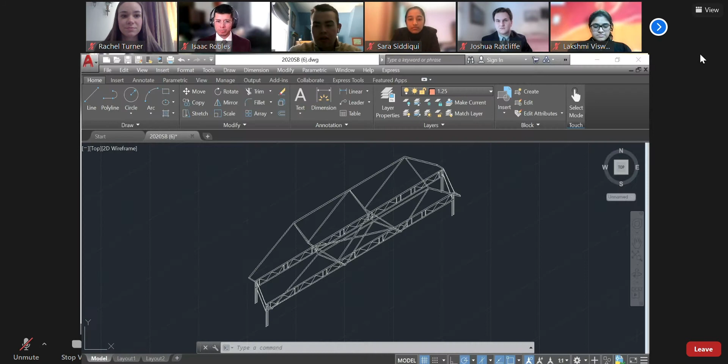Hi, guys. When we first started the design, the first things we had to consider were the restrictions that came with the work site. Our three main ideas were a deck bridge, a Pratt truss, or a Warren truss. When we weighed both the advantages and disadvantages of all the designs, we decided to go with the Warren truss, and Sara will explain the disadvantages and advantages.

Some of the advantages of this design are that it's symmetrical, sturdy, and aesthetically pleasing. It has less building material than most other bridges. Since it's constructed piece by piece, it's more cost effective rather than looking at the whole picture, and it gives more options on how it can be built. Since it has triangular aspects, it makes it even stronger.

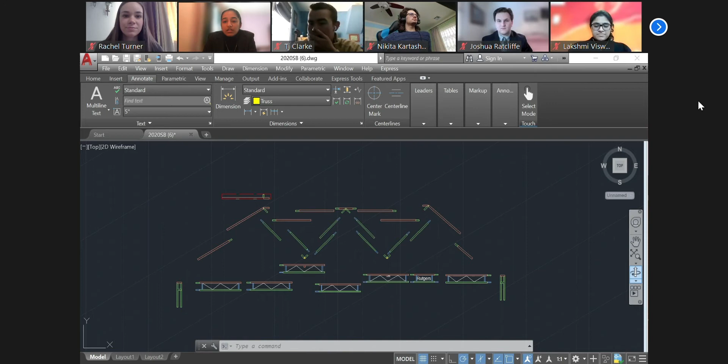Some disadvantages are there may be more parts than a normal deck bridge. Since it's constructed piece by piece, there's going to be a need for routine checks and maintenance, and the long aspect of the bridge may have some more deflection. Given the disadvantages, it shouldn't be much of a problem to adjust due to the properties of the bridge itself.

Thank you, Sara. Now we're going to go on to the analysis section. Josh, you ready? Sure. Thank you, Isaac.

I just want to preface this by saying that after analyzing the design of the bridge, we have full confidence in the performance of the bridge that will be able to handle any of the required loads. As a summary of our findings, we performed a lateral load test using a 50-pound load in the horizontal direction, and we found that the bridge deflected only 1/100th of an inch in the direction of that load.

For our first loading scenario where we considered vertical deflection, we found that the bridge deflected 0.0306 inches at the D1 location that was specified. It deflected 0.0279 inches at the D2 location, and it swayed a negligible amount.

In our second loading scenario, we found that the vertical deflection of the bridge was 0.0309 inches at D1, 0.0296 inches at D2, and similar to the first scenario, it did not sway a significant amount.

To come about these results, we performed both computer analysis and hand calculations involving no less than 2 people, both performing the calculations and checking the calculations. So we used both 3D and 2D modeling, and I'll bring up on my screen one of the 3D models that we used.

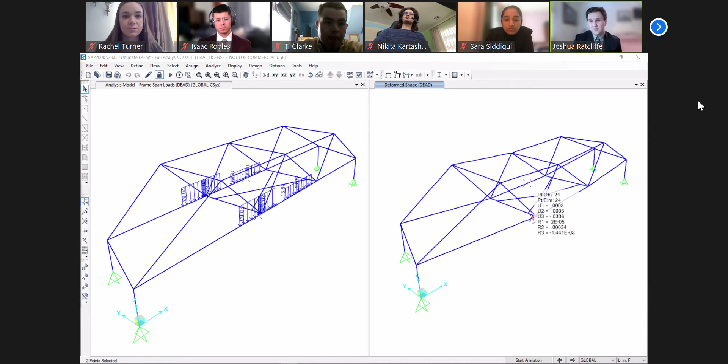To talk about how we verified these calculations and these models, I'll pass it over to Kathleen.

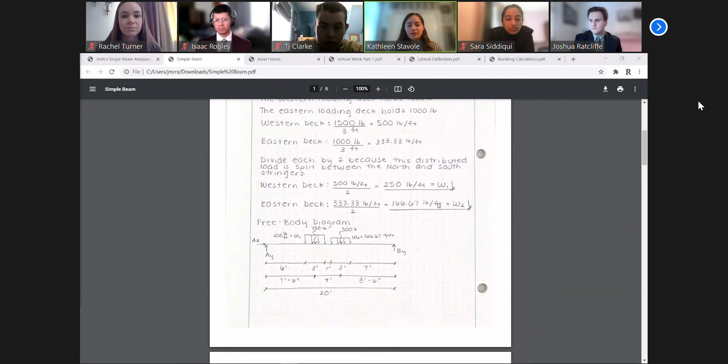Thanks, Josh. To begin, what we did was take a single beam representative of the south stringer, and we found the moment and shear diagrams for the stringer. Josh pulled it up on the screen so you could see some of our hand calculations.

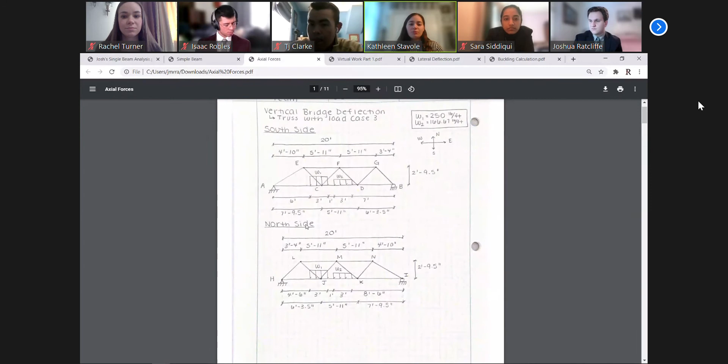After we got the moment and shear diagram, we moved on to the actual truss analysis, using method of joints to find the axial forces. We did this for both the north and south side, and for all the members, to aid in finding the deflection at certain locations that Josh had previously mentioned.

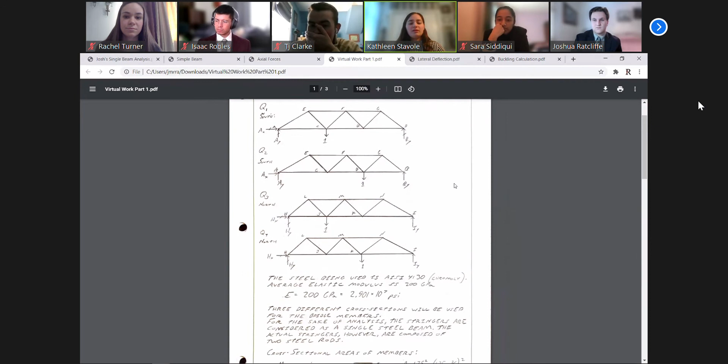After that, we used the principle of virtual work to find the deflection, so we did the truss analysis again, except just for the virtual trusses for north and south, to get our overall deflections. Then we talked about the lateral load test.

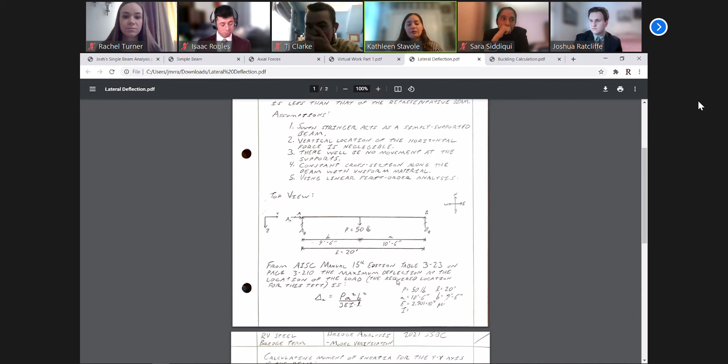We had to keep it very simplified for the hand calculations, and we'll primarily focus on our SAP analysis and results, since it takes into account the bracing and more of the stiffness of the overall bridge. This is a very simplified calculation, and our sway is definitely higher than that of SAP, but it's nothing we're concerned about, since we're taking into account less of the stiffening features.

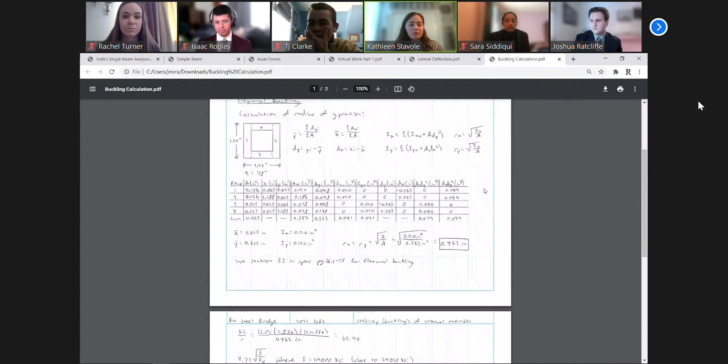Then we went through the buckling analysis, for both local and flexural buckling, and both were good. So everything passes, like Josh had mentioned, and we have confidence in the performance of the bridge.

Thank you, Kathleen. So that handles most of the conceptual project part. We'll go on to construction. Lakshmi, you ready? I am.

With the construction sequencing, our goal was to have a plan to make it as cost effective and as timely of a build as possible. Given the design of the bridge and the materials we were given to work with, we decided to have a few components to the plan.

Our main plan would be to have 4 builders on site in total, 2 on each side. The materials needed on site include 4 stub nut drivers, 4 leather pouches to carry materials back and forth, 4 hard hats and 4 safety glasses to enforce safety standards and procedures, and finally 97 nuts and bolts each to help assemble the connections.

The sequencing we decided to go with is what we call a diagonal crossover, where there will be 2 builders on each side. On each side they'll start by building the footing, then assemble the decks on their side respectively, and finally assemble the trusses. Once both sides are completed, they will come together from a diagonal crossover.

It's a rather innovative way of construction, since this type of building has never been done before by prior companies, and we think this will be the best way to build our bridge effectively. We hope to inspire other bridges to be built the same way as well.

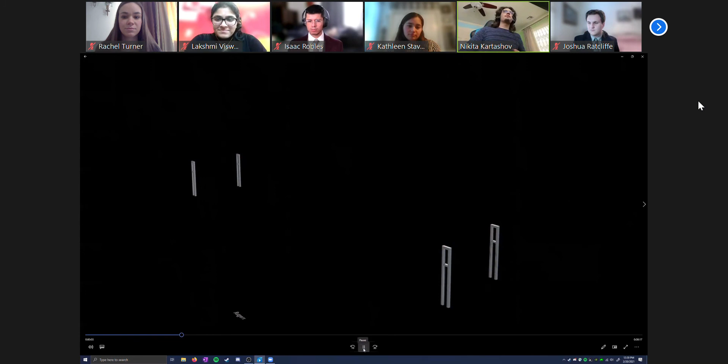Sure, no problem. First, we'll start with the supports, located on the 4 sides given to us. We'll then do the stringers with the cross method as described by Lakshmi. Then we'll focus on the bracing to support the 2 stringers together, so we can work on the truss, which will then be assembled in individual pieces as shown below. Finally, after all that is complete, we'll finish off with the bracing at the top of the truss.

Thank you, Nikita, that is our construction processing and sequence. Let's take it back to Isaac. Thank you, Lakshmi, thank you, Nikita.